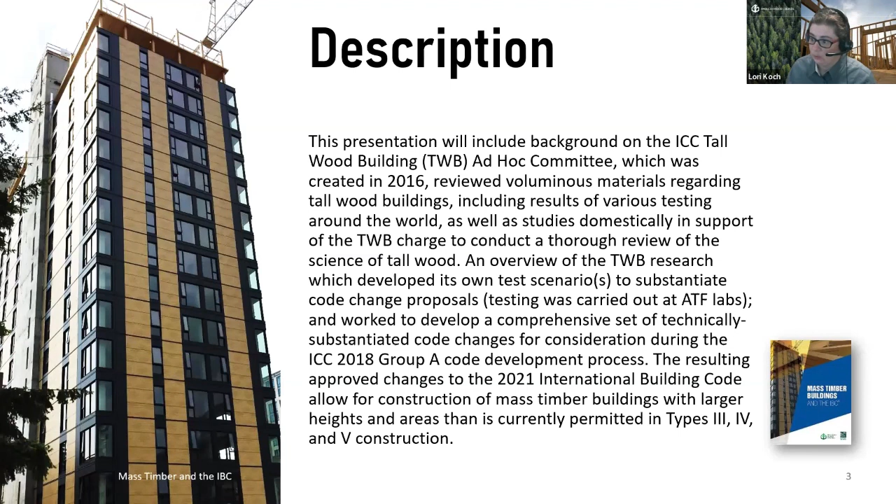Before I get going, I want to emphasize that we're talking about mass timber buildings. These are buildings built from large members, including cross-laminated timber (CLT), glue laminated timber, and nail laminated timber, with members typically on the order of 150 to 200 millimeters in cross section. So these are fairly stout members.

Traditional wood frame construction in the United States has leaned towards conventional light frame construction, illustrated here on the right. These are repetitive members spaced close together, probably on the order of 16 inches on center, about 40 centimeters apart. The members are relatively small in cross-section, approximately 50 by 150 millimeters, give or take. The maximum height we'd see on buildings like this is roughly 4 to 5 stories.

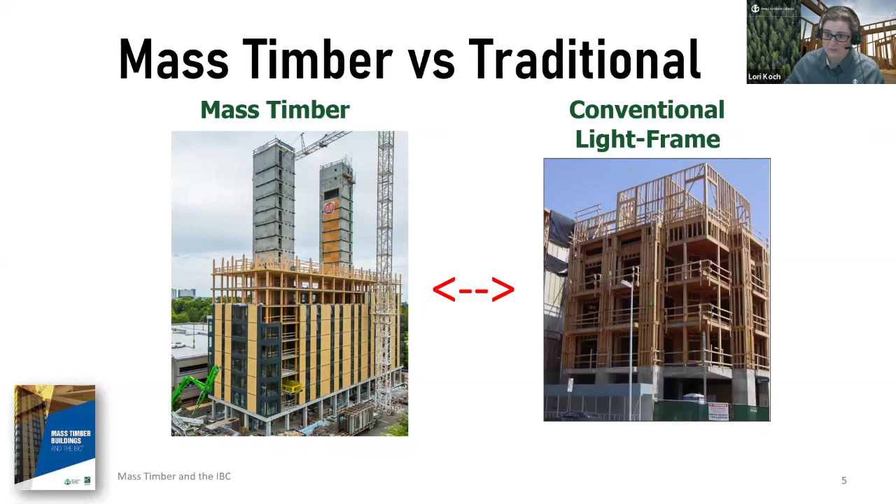Another historical wood frame system that has existed in US building codes for many years, even before we really had building codes, is what's known as Type 4 heavy timber, or Type 4 HT. This is closer to the Type 4 mass timber buildings we'll be discussing. These heavy timber buildings are made of members on the order of about 150 millimeters square, sometimes larger. They have historic roots in old industrial buildings common in America, where the interior was built with very large cross-sectional timber members for floor joists and columns.

The exterior walls of these buildings would be some sort of brick or other non-combustible material, and their performance has been demonstrated throughout history to be good. As the saying goes, if it's not broke, don't fix it. So with Type 4 heavy timber buildings, the provisions were not changed in the 2021 IBC, but they influenced the creation of the mass timber building types we'll outline: Type 4A, B, and C.

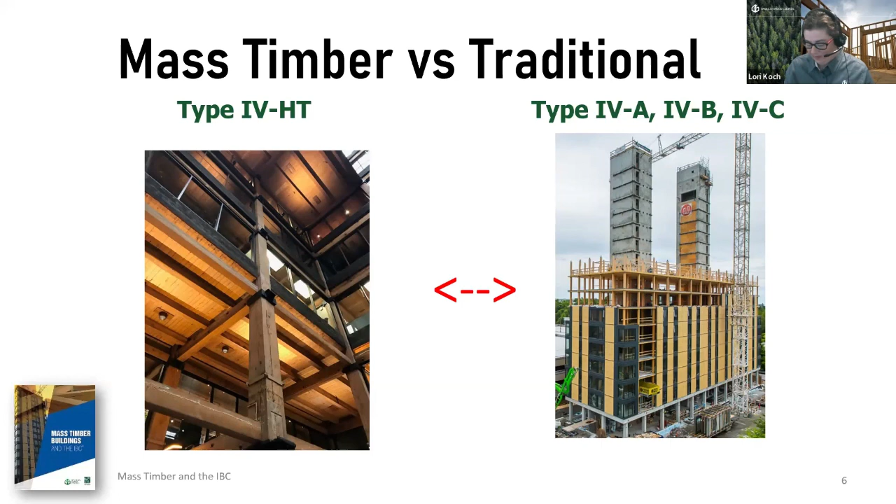So first, today I'll talk a little bit about the Tallwood Building Ad Hoc Committee and their work and some of the consensus process that they undertook. Then I'll close it out with the new construction types and what they look like in the building code.

This ad hoc committee on tallwood buildings was established by the International Code Council in December 2015. Their goals were to explore the science of tallwood buildings, investigate if they were feasible, and if so, take action on developing code changes for tallwood buildings.

This was a very robust committee, a consensus committee with a balance of stakeholders. When we say consensus, we mean everybody on the committee had to agree to any changes before they would be implemented. This group was made up of experts from across the country, both geographically and from various building construction material industries and areas of expertise.

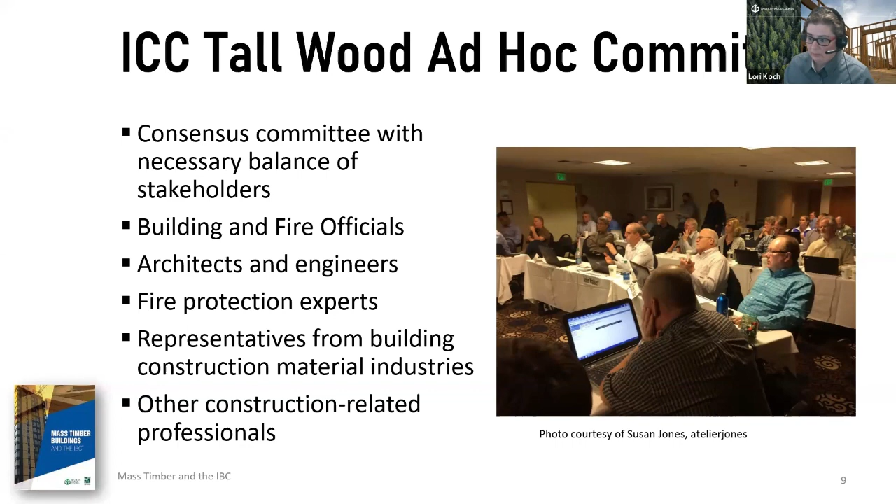We had experts in the building code, experts in the fire code, architects and structural engineers, fire protection engineers and other fire protection experts, and other construction-related professionals whose input was monumental in getting this effort across the finish line.

There were several work groups created as part of this committee, and primarily today we're going to talk about the work done by the fire work group. The fire work group created fire test scenarios to study and validate these tallwood building change proposals.

The largest test done by the fire work group was a full-size two-story condo or apartment style structure. The interior dimensions of the apartment area are about 30 feet by 30 feet, which is about 9 meters by 9 meters. The structure also had a corridor and a stair.

When deciding how much stuff was going to be inside these apartments, a research study done in North America by an organization called UL helped us determine a modern furnishings fuel load was appropriate. We used a fuel load approximately the 85th percentile of a residential fuel load, called a Group R fuel load in the building code.

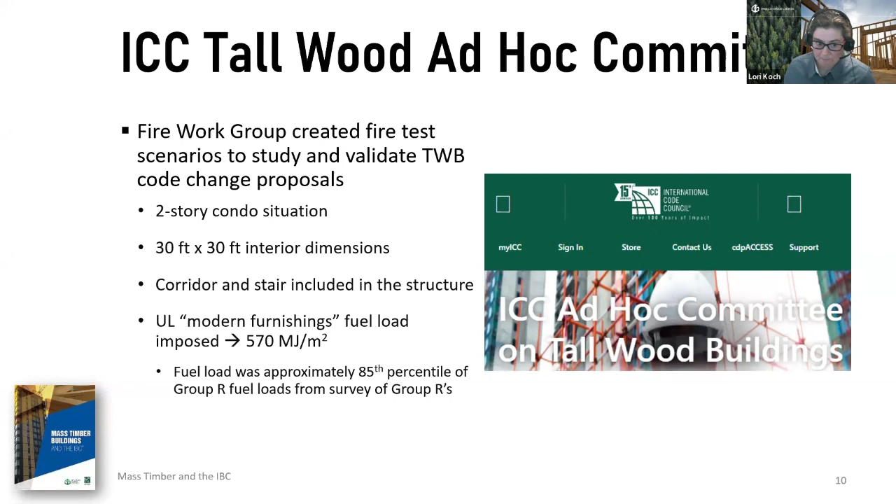So this is what the building looked like before we started setting it on fire. The purpose of these tests was to perform realistic fire scenarios applicable to tallwood construction, and they wanted to evaluate two main things: occupant egress and firefighter tenability for suppression efforts.

This means we wanted people in the building to be able to safely get out, and we wanted firefighters to be able to safely get in to fight the fire.

This test was done at a U.S. government facility owned by the Bureau of Alcohol, Tobacco, and Firearms, and it was also supervised by U.S. Forest Products Laboratory staff, a division of the United States Department of Agriculture.

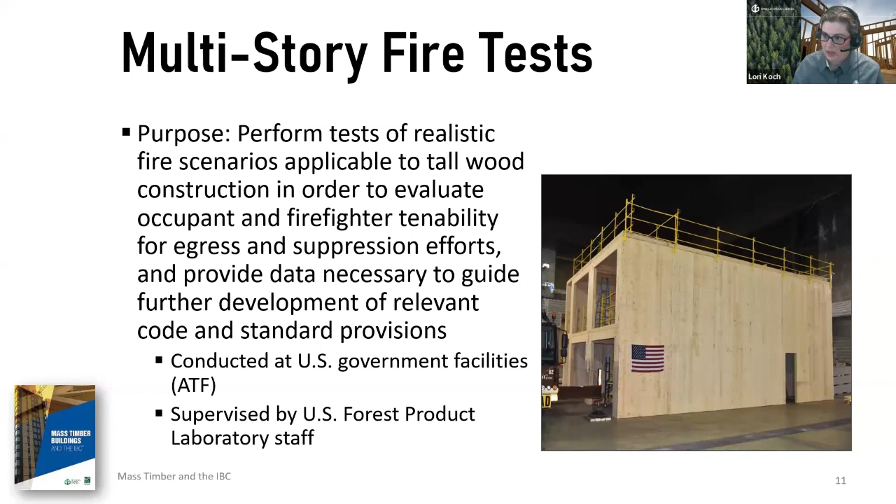There were also several other individuals present for this series of tests. I was actually able to witness the first one, but they were done on separate days, so different folks witnessed different ones.

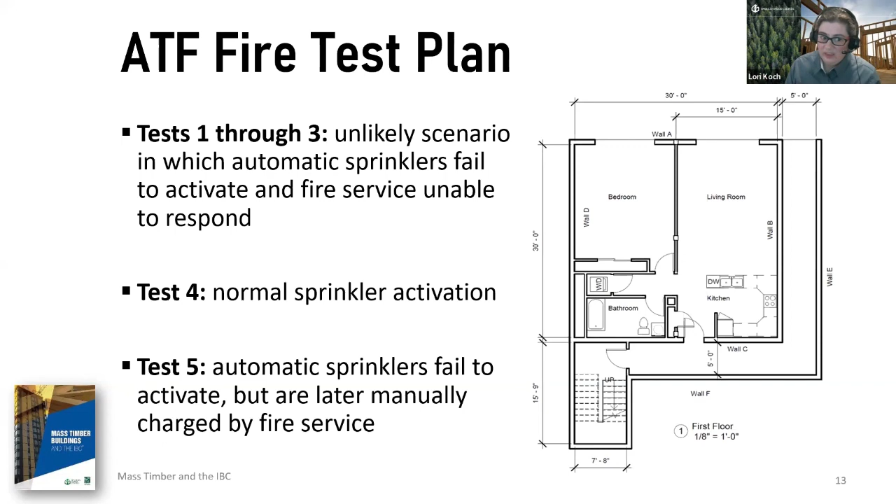The other important thing for all of these tests was that each type of proposed building, or each proposed building type, was represented in the fire test scenarios. There wound up being 3 new proposed building types in the code, and each of them was represented in at least one of these 5 tests.

The first test is the baseline test. This is akin to a type 4A structure where all of the mass timber surfaces are protected with 2 layers of 5/8 inch thick type X gypsum wallboard. Type X gypsum wallboard is a cementitious board applied over the mass timber, and it's considered non-combustible. This establishes a baseline for a structure where no mass timber is exposed and won't contribute to any fuel load.

Tests 2 and 3 both had a little bit of the CLT exposed in the living room and bedroom areas. Test 2 had some of the ceiling area exposed, and test 3 had 2 of the walls exposed. These first 3 tests were pretty long in duration, between 3 and 4 hours. They were allowed to run until the fire ran out of contents or fuel to burn and went into what's known as the decay phase, where it's no longer gaining energy and is starting to extinguish itself.

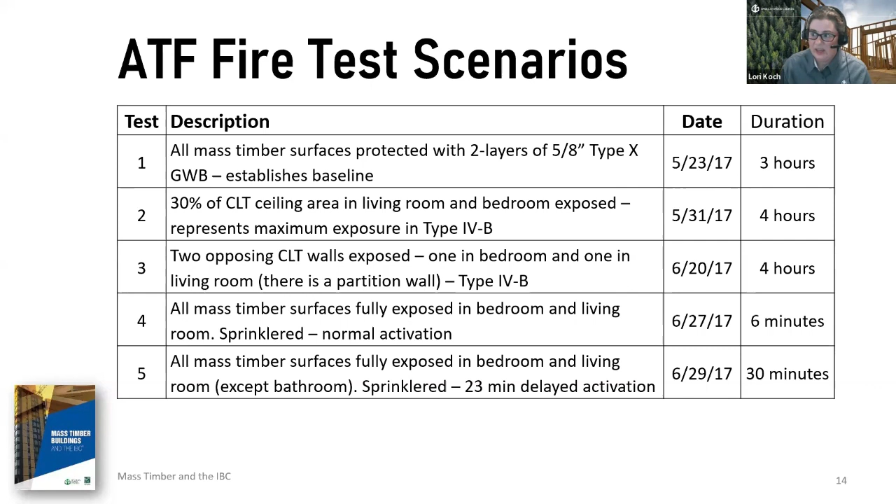The last 2 tests represented a type 4C structure, where all of the mass timber surfaces are fully exposed. In test 4, the sprinklers activated normally. In test 5, the sprinklers had a 23-minute delayed activation. We'll talk about why we picked that number, that 23 minutes, in a little bit.

Looking at the structure again, here's a 3D rendering of the wood elements present in this structure. As mentioned, it's a 2-story structure with 1 apartment per level. Each apartment is roughly 30 feet by 30 feet, or 9 meters by 9 meters. The height of the ceiling is 9 feet, just shy of about 3 meters.

We used what's called a 5-ply CLT, meaning there are 5 layers of Douglas fir larch lumber in that cross-laminated timber panel. Each ply, or lamination, is 1.375 inches thick, around 35 millimeters. The whole thickness of the panel is 6.875 inches, or around 175 millimeters. The laminations are connected with a polyurethane adhesive between them. There's a corridor around each apartment and a stairwell in the back.

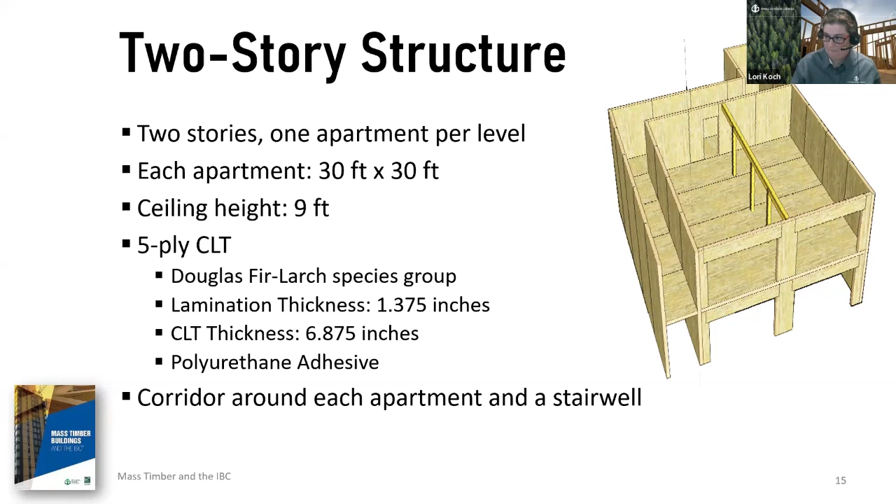Looking at a more finished version of the structure to give an idea of the layout: when I talk about the kitchen side versus the bedroom side, in between we have 2 main areas - a kitchen and living room, and a bedroom and bathroom area. Looking at this top illustration, the leftmost room is the kitchen/living area, and the rightmost room is the bedroom and bathroom area. Since most fires are found to start in the kitchen, in the fire tests we will see the point of ignition occurs in the kitchen.

Each of these 2 rooms is roughly 15 feet by 30 feet, about 4.5 meters by 9 meters. Between the apartment and the corridor, we have a 20-minute rated door. Between the corridor and the stairwell, we have a 90-minute rated door. The partition between the kitchen/living area and the bedroom/bath area is made of a 1/2-inch unrated gypsum wallboard, which is different than the type X gypsum used in other places.

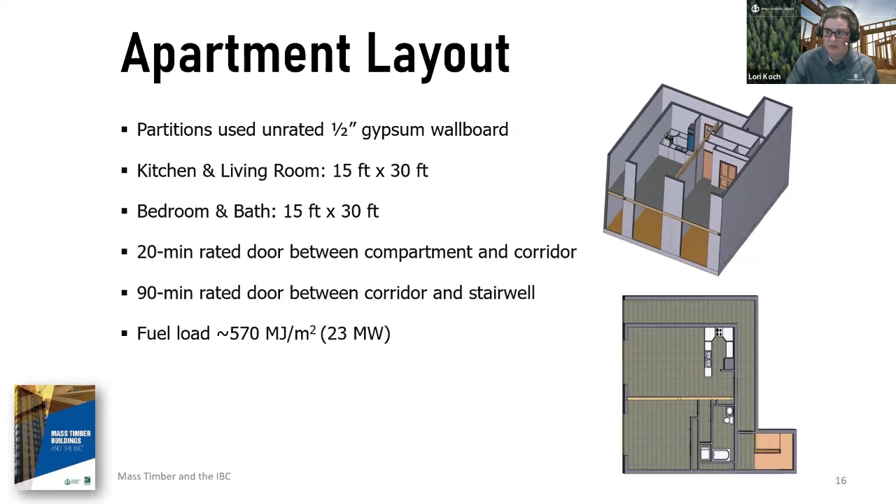Going in for a typical tour of what it looks like after it's constructed, but pre-testing, we see that a good portion of the fuel load was achieved through a combination of typical residential furnishings. We have combustible floor coverings, combustible cabinetry, and other contents that can combust. But even with all of the furnishings and contents, we still found it was necessary to add additional load to achieve that 570 megajoules per square meter.

So we see in certain instances the addition of wood cribbing on top of the desk here. You can see quite a bit of it. Next to the bed in the center bottom illustration, you'll see some additional fuel around that. That's why you see those pieces of wood present to obtain the necessary fuel load.

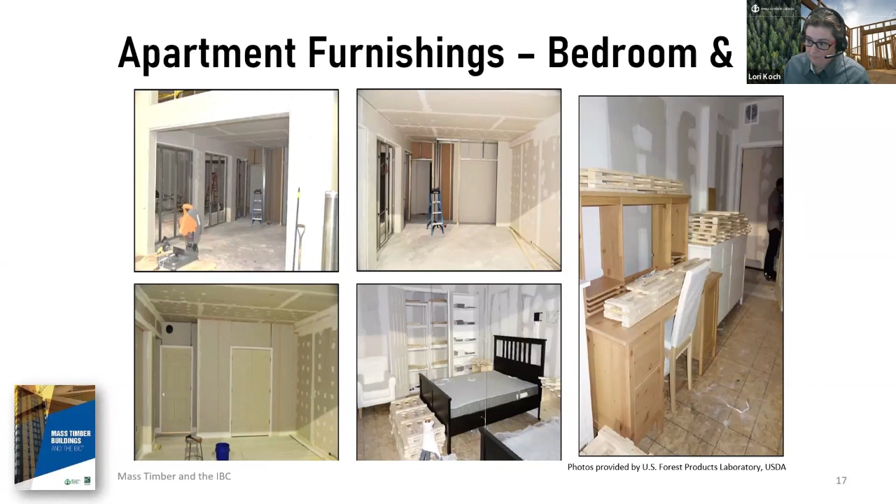This shows the top floor apartment that we tested that had some of the ceiling exposed. Also of note, we have a soffit, which is common in kitchen construction, where the ceiling is dropped slightly to accommodate for utilities or other things. In mass timber structures, we cannot have mass timber exposed in concealed spaces. So that's why we do see these steel studs present in this top left photograph here.

Additionally, each unit did have plumbing, mechanical, and electrical penetrations, but the utilities themselves were not actually connected. The penetrations were protected as required by the current code to make sure those requirements were effective when used with mass timber structures.

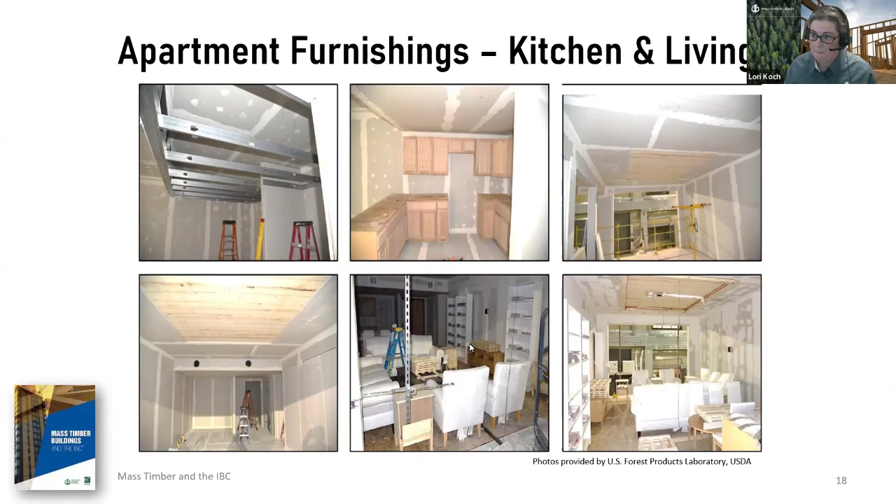So as I mentioned, test one, the first test we did, was our baseline test where none of the mass timber was visible. It was all protected with 2 layers of this 5/8 inch thick type X gypsum wallboard. And this is an illustration of the test beforehand, and I have some pictures.

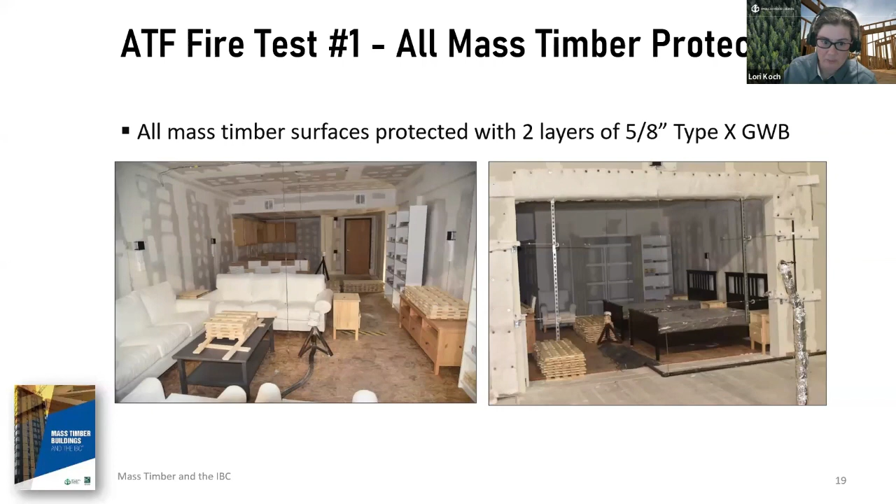So we've gone through our decay phase where the fire was allowed to burn without intervention. It consumed all the fuel in the compartment. We found that once the combustible contents were burned through, there was no additional fuel. The mass timber elements did not become involved or contribute to this fire in any way.

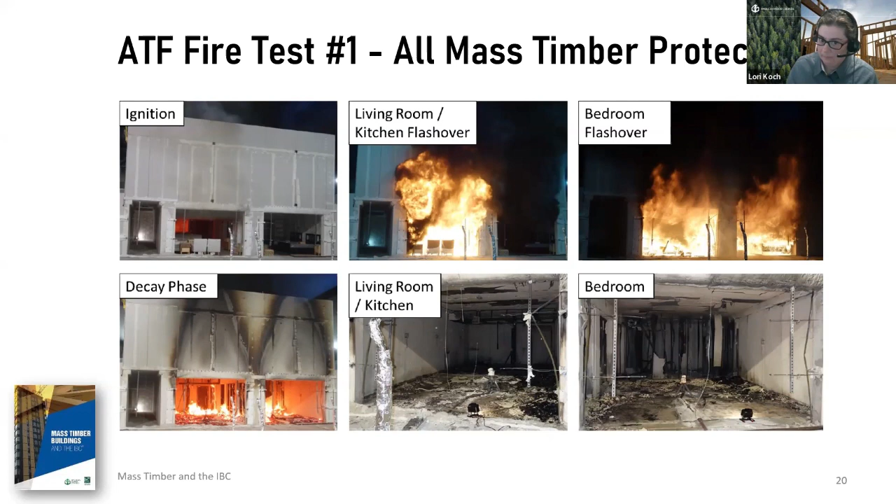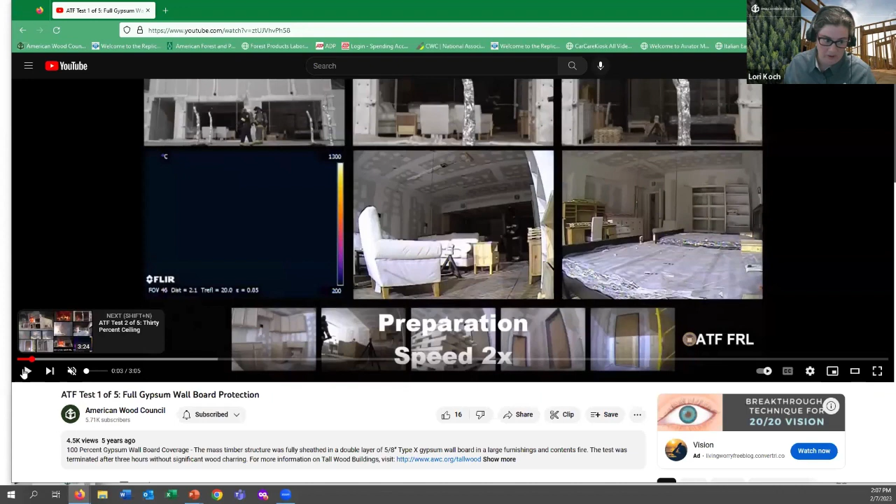And I do have a video of this test. Let me go ahead and drag this over, and we are going to keep it muted because the sound isn't so important. If you are interested, the link that we'll show on the slide has a link to our YouTube channel where we have videos of all 5 of these tests.

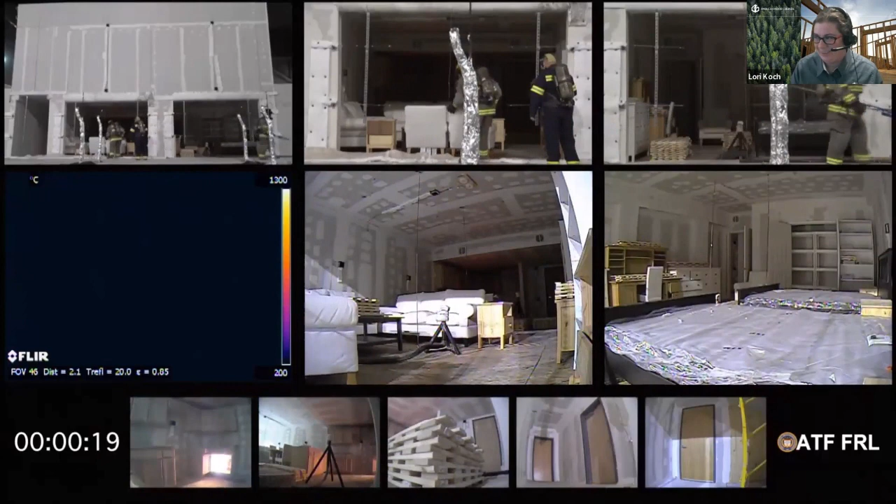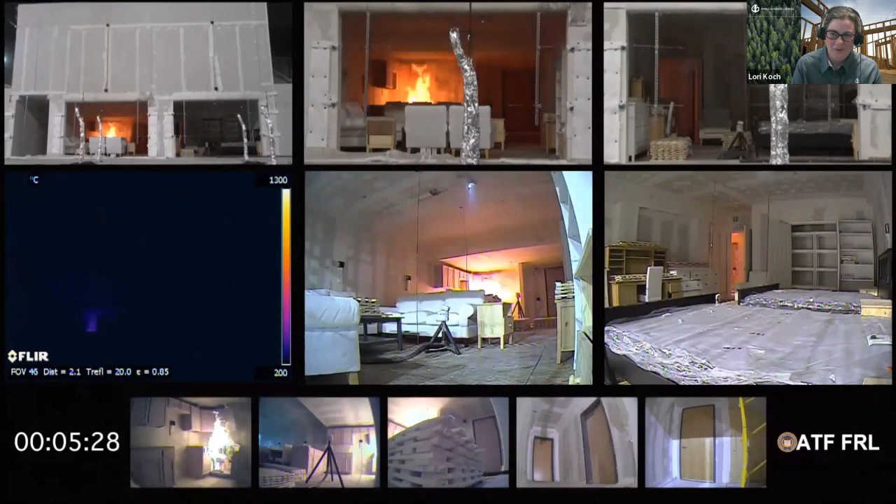But in my opinion, this one's probably the best one. It was the kind of most intense heat that was measured from all of them. They were all pretty close, but this one also was the first. So we thought we knew what to expect, and the results were in line with what we had modeled, but we also had that element of we weren't 100% sure.

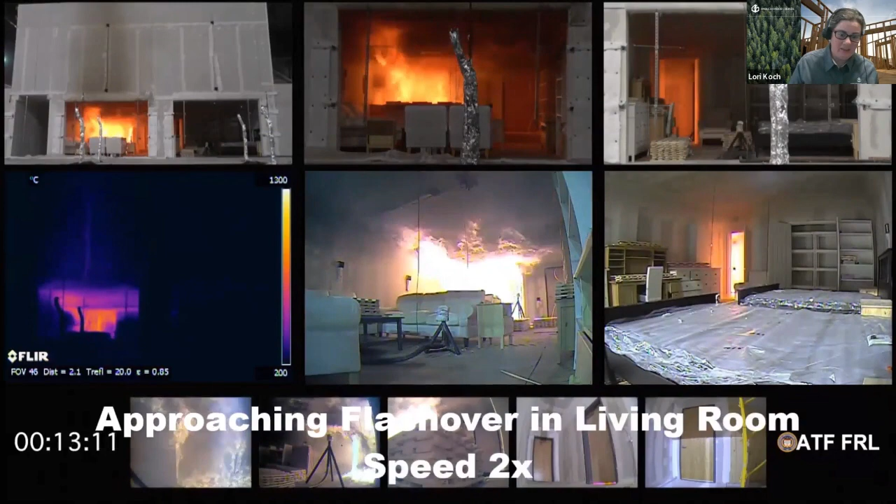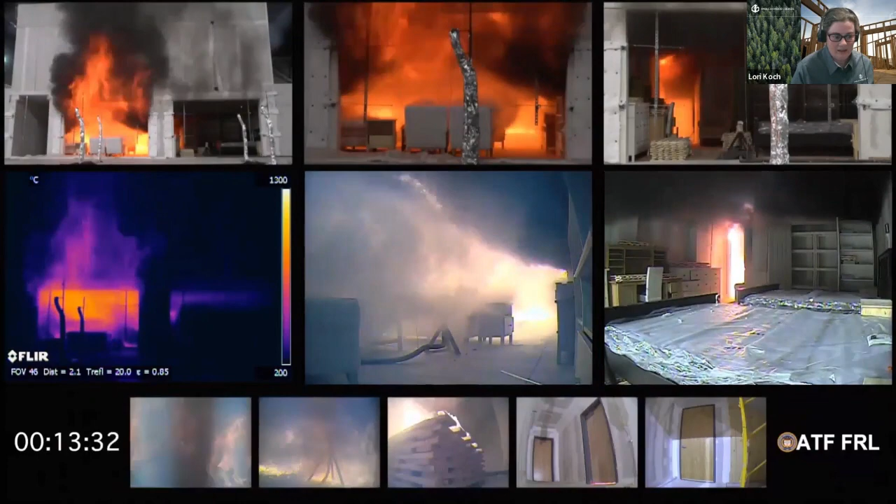So we see that we're approaching flashover in the living room compartment. As the flames propagate across the ceiling, the air becomes superheated, and then the contents will ignite. And then as we then approach the second compartment, it starts to contribute, become part of the fire load. We see on the thermal image on the left side of the screen, the ceiling heating up as we approach flashover in the second compartment in the bedroom.

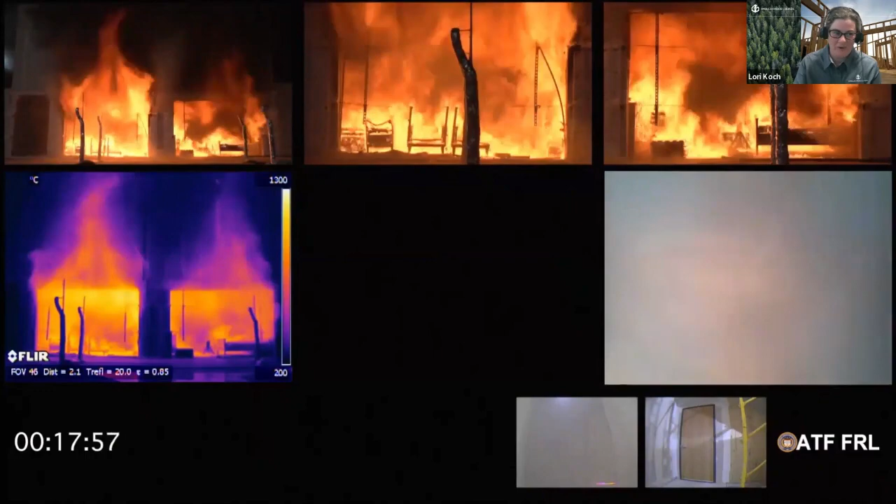And there we go, there's our second flashover. Again, that happened about 17 minutes after ignition. So the rest of the test was less interesting from this point out. We just kind of had to sit and wait for it to finish.

So we've got this time lapse here. We do have some videos showing the performance of the fire-rated door, which was a 20-minute rated door, and it failed just about 58 minutes. So in line with the performance that we would want.

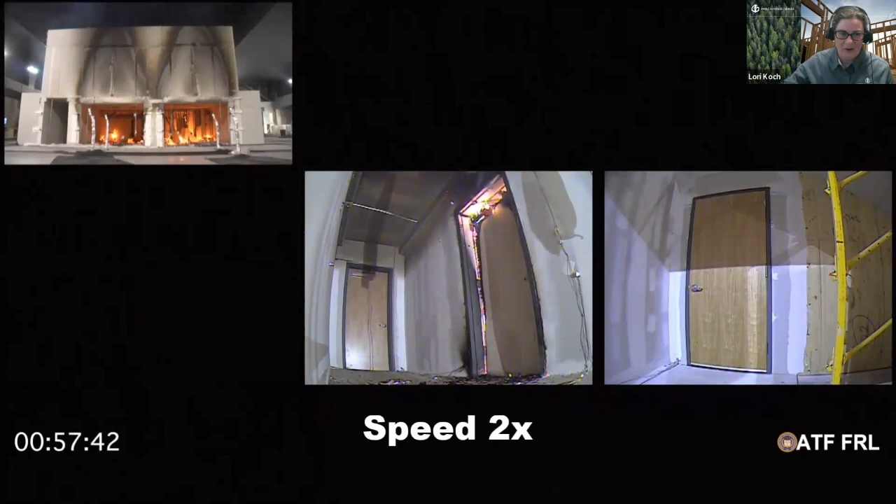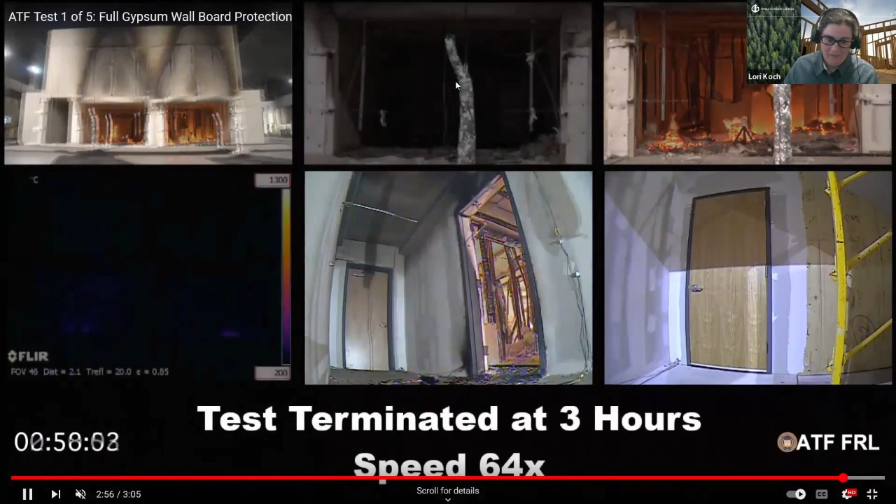As the intensity of the fire starts to die down a little bit, some of our cameras were able to come back online. And there we see the test terminated at 3 hours.

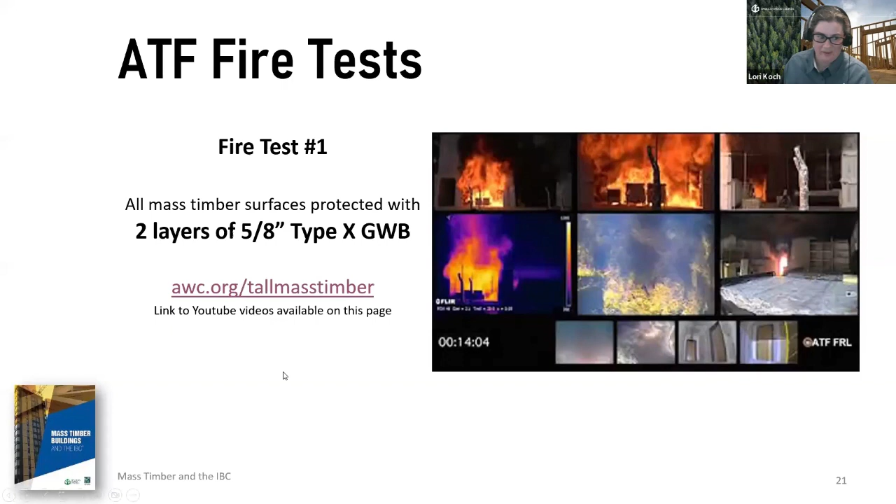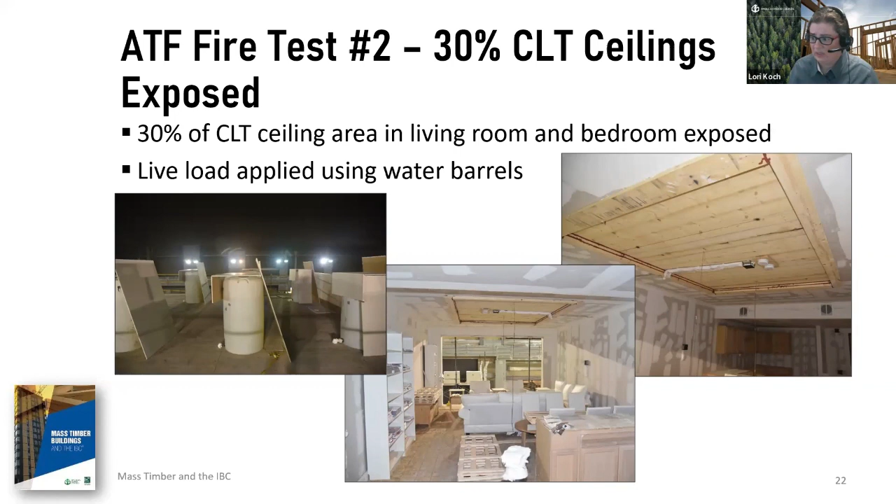Test number 2 was similar in that we had some of the CLT covered with type X gypsum, but 30% of the ceiling area in the living room and bedroom areas was exposed. We had live load applied on top of the structure using water barrels, in line with the residential design load used in the structure. This was again in line with type 4B construction, where some CLT is allowed to be exposed, but the remainder must be protected.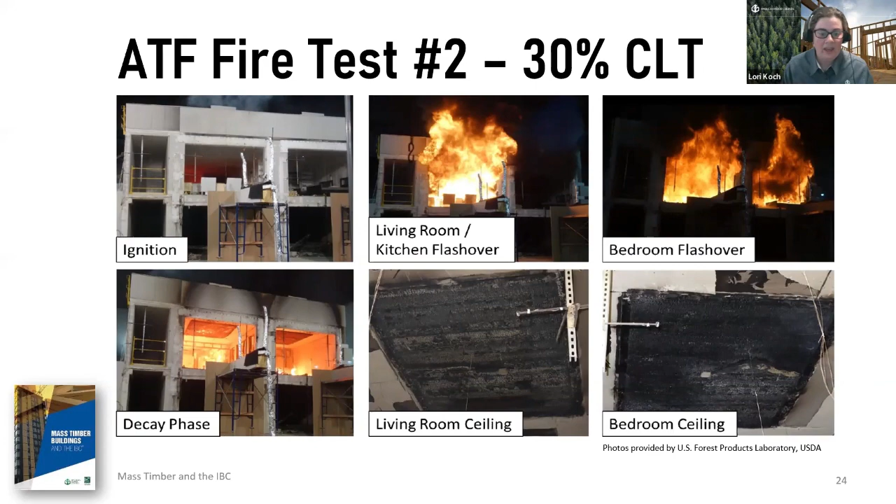We have some photos of that test. Ignition again in the kitchen, and both compartments flashed over almost exactly the same amount of time after ignition. The living room kitchen area was again 12.5 minutes, and the bedroom was at 17 minutes, so almost to the second. We see the decay phase in the bottom left, and the bottom center and bottom right illustrations show the CLT panels that were exposed during the test.

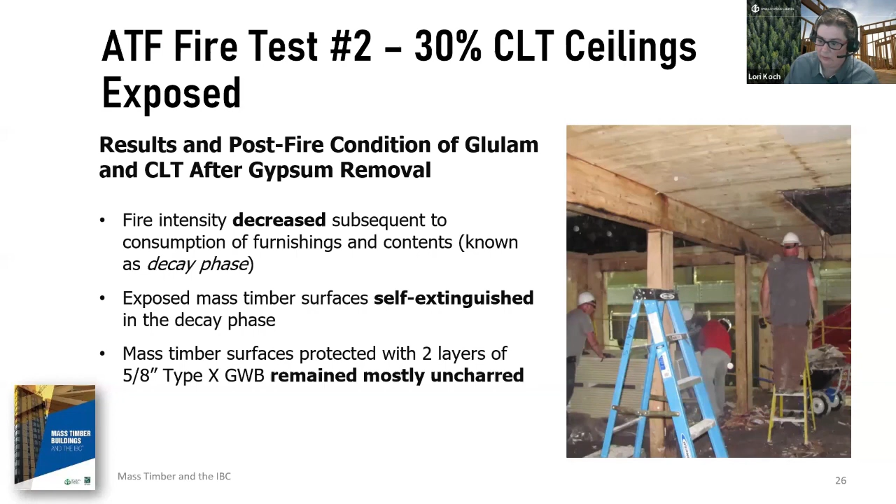Again, the areas protected with the gypsum wallboard were largely uncharred, with the exception of a little bit of limited charring just at the corners of the glulam beam noted here. But the remainder of the mass timber elements remained largely intact.

After the fire, the section of mass timber that was exposed to the fire was removed and replaced for the next test, and sections of that panel were sliced so they could be more closely examined.

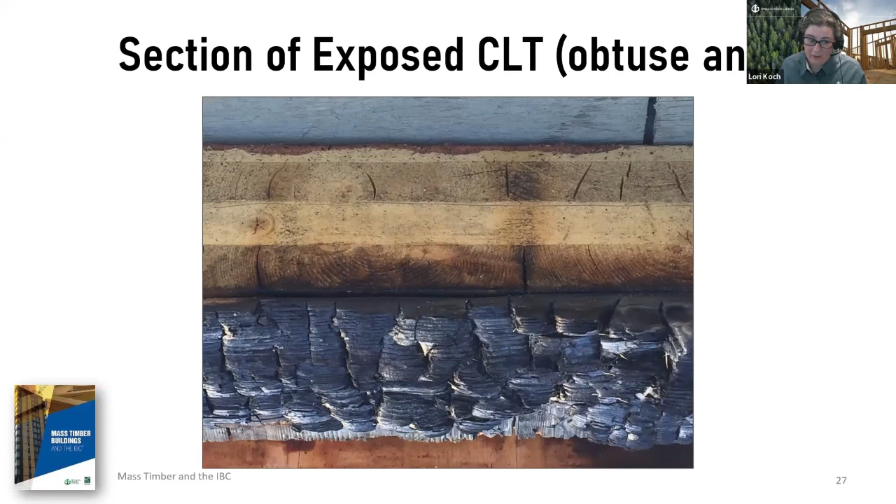Here's an obtuse angle, not exactly straight on, of the panel we see after the test. We see a char layer that we call kind of an alligator skin pattern, because it does look a little bit like an alligator hide, clearly visible, and the protection of the inner layers by that insulating char is noticeable as well.

Looking at another cross section, once the char is knocked off, we can see more clearly how much of the material did remain intact after the test.

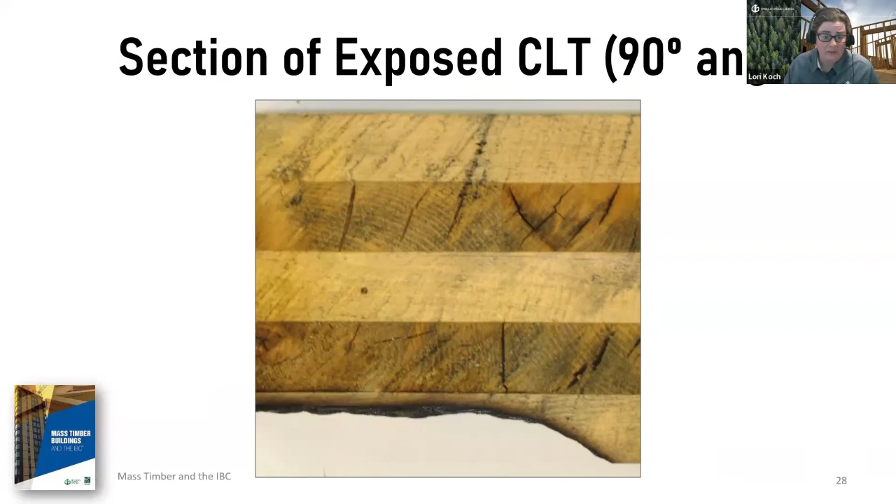In this illustration, we see a portion of the CLT is not damaged on the right edge of the photo, and that portion was protected by the gypsum wallboard. The portion that was unprotected is more towards the center and the left, and we do see we have lost approximately 1 full lamination, or about 1¼ inches, which is 30 millimeters or so, but the remaining 4 laminations are relatively intact.

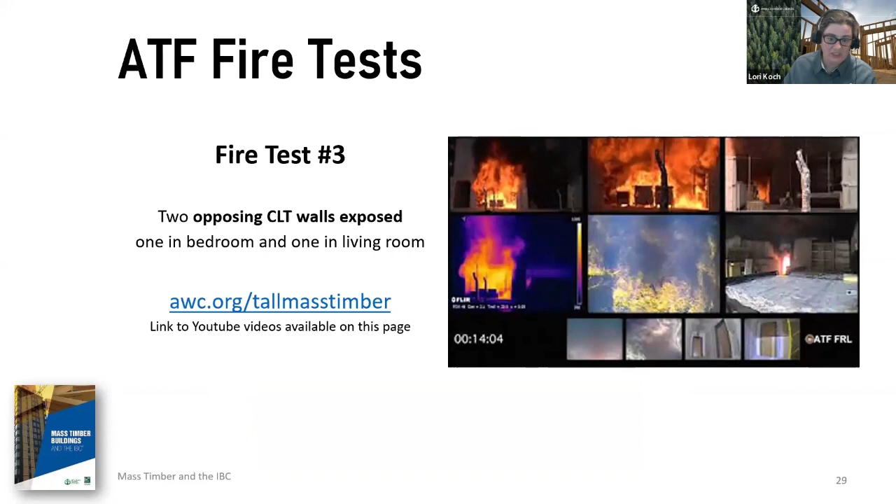The center partition, which separates these 2 rooms, has in each of these tests an unrated gypsum wallboard covering. It does not need to be fire resistance rated because the glulam beams and columns are actually carrying the load, so the wall itself is non-load bearing.

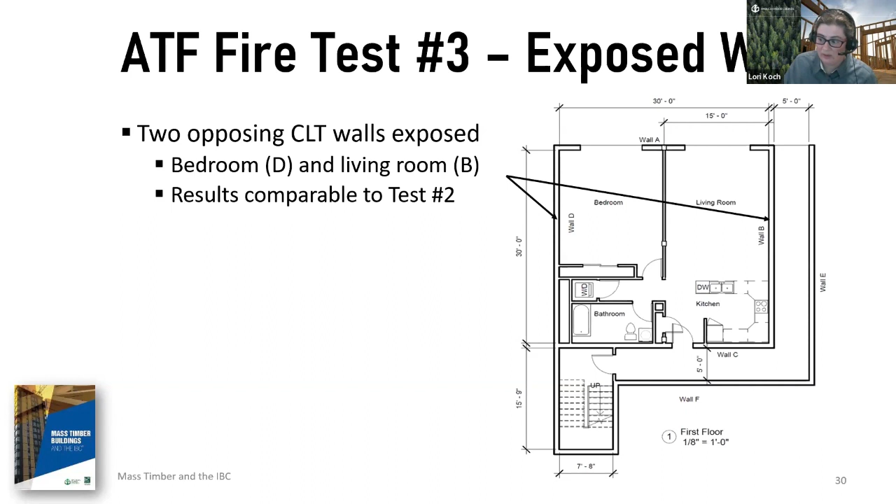Test 3, again done on the top story of the structure, had flashover occur in both compartments around the same time as the first 2 tests, and the fire was allowed to progress without intervention all the way through the decay phase and through burnout.

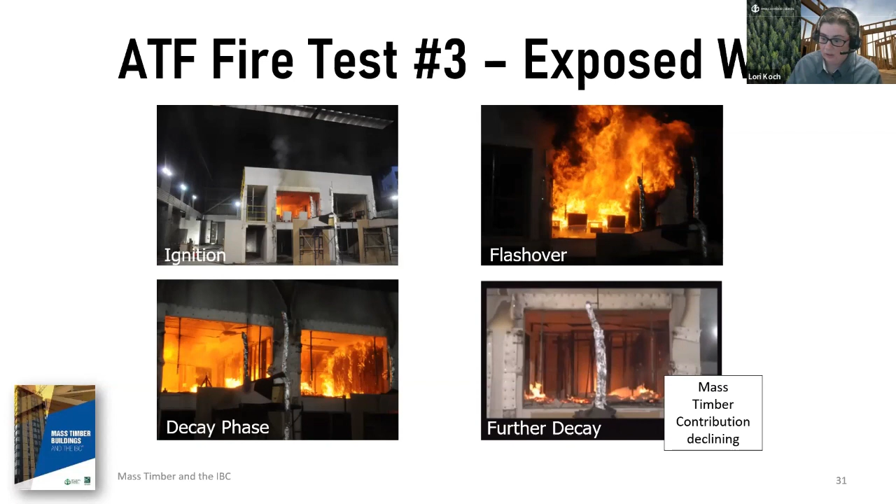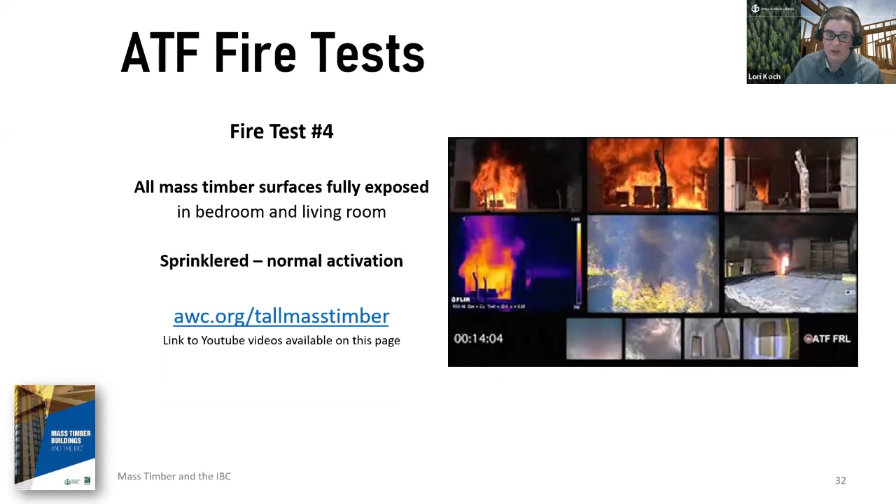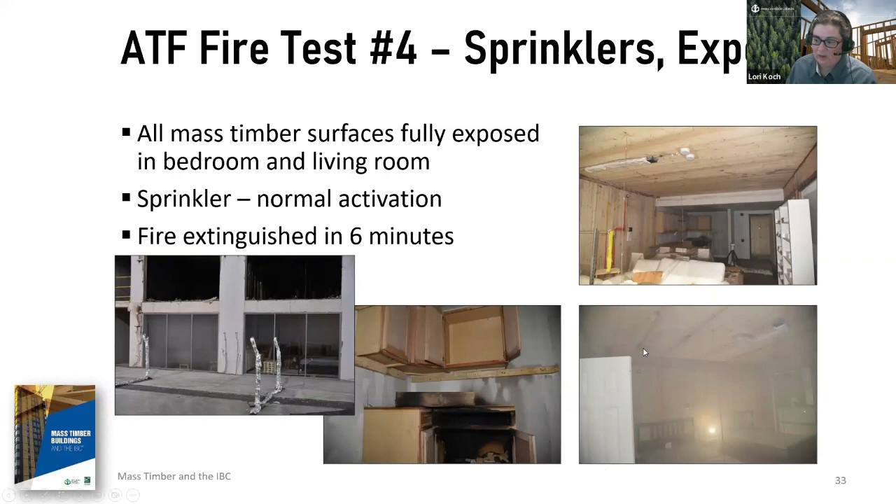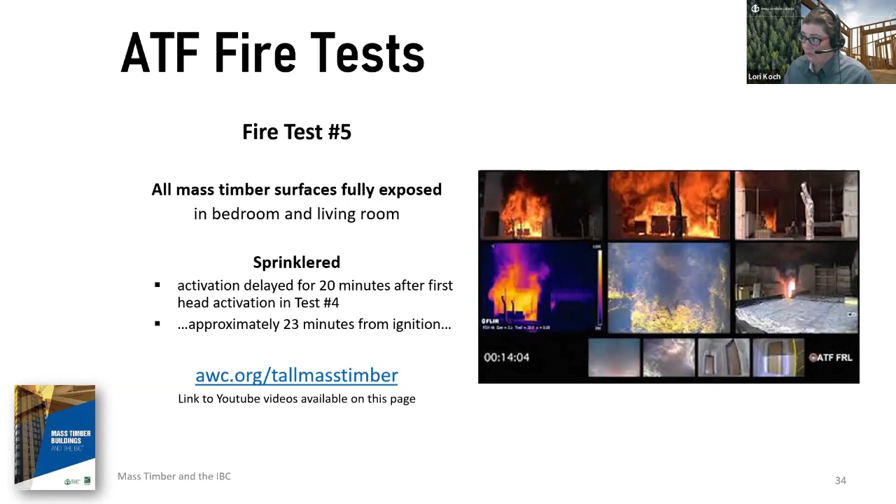Test 5 is again another test where all of the mass timber surfaces are fully exposed in the bedroom and living room areas. There was a delay in the activation for the sprinklers, 20 minutes after the activation time from the previous test. In the previous test, the sprinklers activated around 2.5 minutes after ignition. We added 20 minutes to that time and got roughly 23 minutes. That's how we picked the activation time for the sprinklers. This represents a scenario where the sprinkler system did not automatically activate, but was subsequently charged by the fire service, the firefighting crew, upon their arrival at the scene.

Flashover was reached in the kitchen compartment during this test, and the bedroom area was close to reaching flashover, but did not reach it before the sprinklers activated. Within 7 minutes of the sprinklers activating, the fire went from the fully developed stage to being effectively suppressed, which is what we see in the bottom picture here on the right.

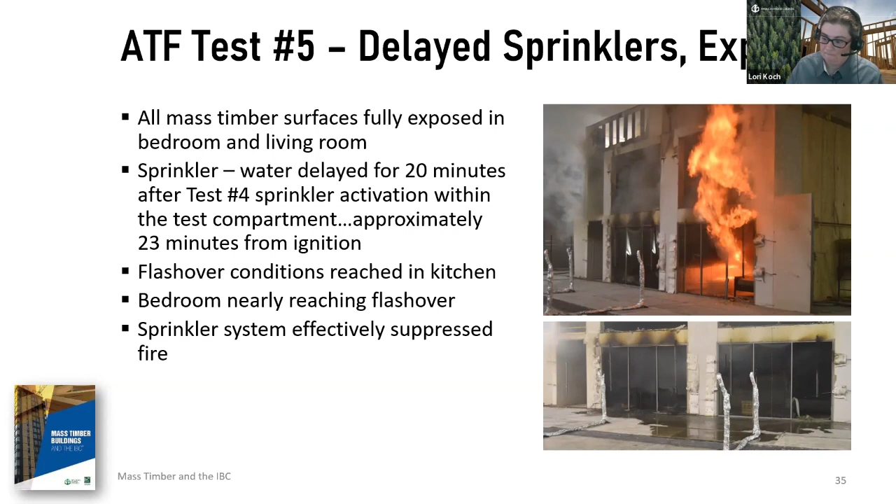Here's a brief event log summary for all 5 of the tests. We see that the flashover conditions in the living room and the bedroom were fairly consistent, roughly 12 to 13 minutes after ignition for the living room and 17 minutes in the bedroom, and this is despite the presence of different amounts of exposed mass timber.

The time it took for the flames to breach the 20-minute rated door into the hallway was higher for tests 1 and test 2. In test 3, we noticed there was a door frame installation error, so the premature failure of the door in test 3 compared to tests 1 and 2 was attributed to that error.

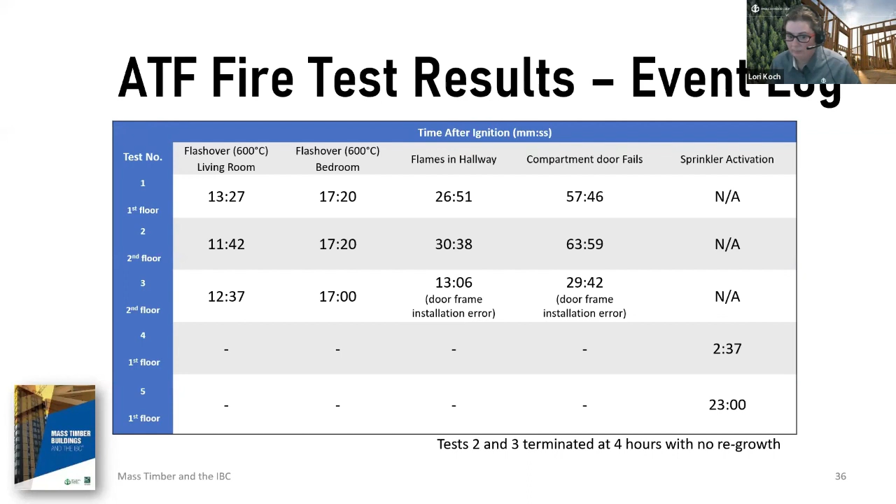Prior to the test, I mentioned we did some modeling, and it's always nice when your computer model agrees with the real data that you see in real life. These particular models were conducted by some fire professionals at the Research Institutes of Sweden, an organization also known as RISE.

This particular graph is from test number 2, where we had 30% of the CLT ceiling exposed. The solid black line represents the predicted heat release that the model showed, and the blue line shows the measured heat release during the test. So the behavior of the test was fairly consistent with the predicted behavior.

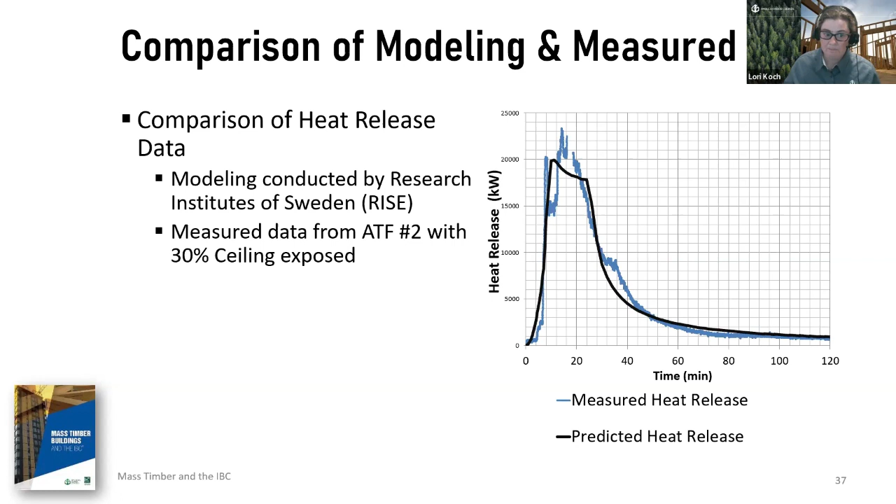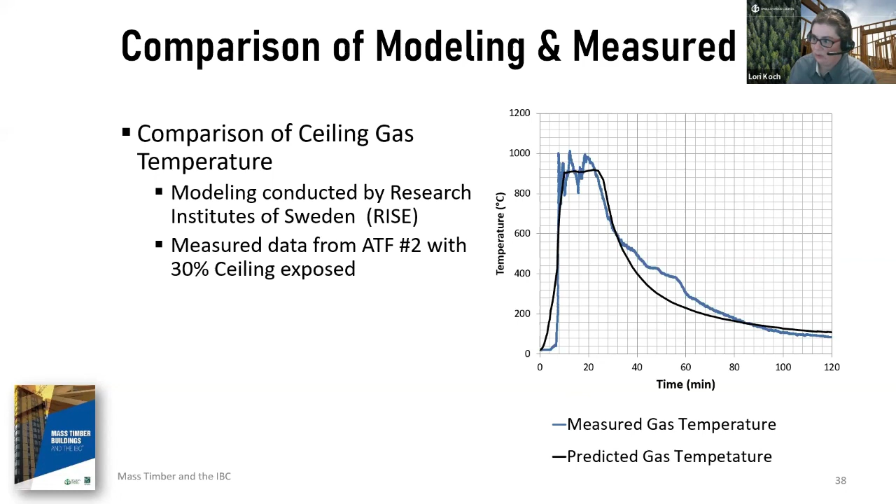Additionally, modeling was conducted to predict the ceiling gas temperature, and this again is data based on the test number 2 model. We saw that the predicted behavior and the actual behavior were very accurate.

So again, each new construction type that I've talked about has been tested in at least one of these 5 ATF tests. This fire test plan was developed by the Tallwood Fire Work Group. However, there was another work group that had some additional input into this test, the structural work group. This structural work group had some generic connection designs that they wanted tested in this fire testing as well, so there were also structural connections being evaluated in this test.

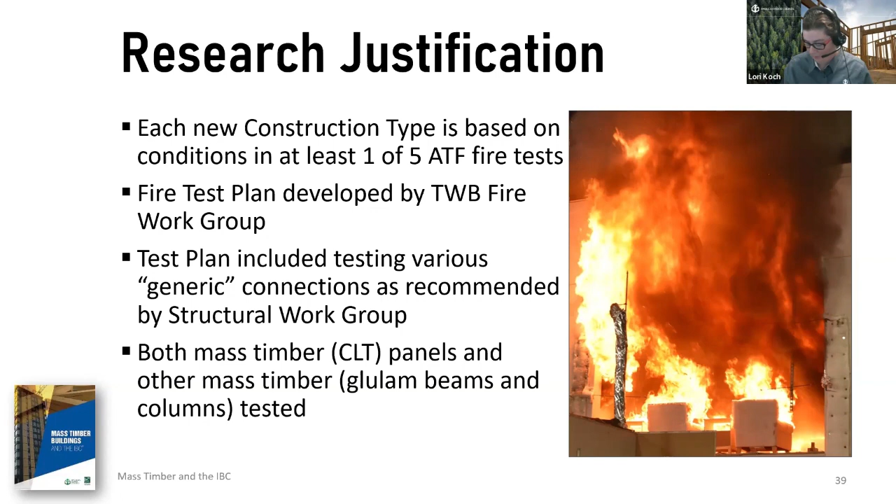I mentioned we tested both mass timber, cross-laminated timber panels, and other mass timber elements, including glue laminated timber beams and columns. If you want a full report of all of those tests, we have a very robust document published by the United States Department of Agriculture, and a link is available on our website, awc.org/tallmasstimber. Videos of all of the fire tests are also available on that website.

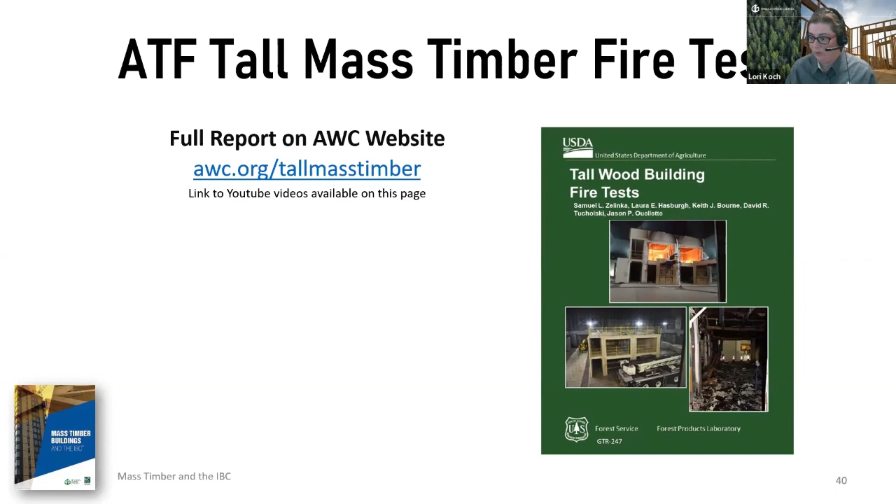So after all of that testing, all of the data was collected, and other code changes were reviewed. There were 14 total code change proposals under what's known as a Group A code change. Hundreds of code sections were reviewed, and eventually the committee decided on the 3 new types of construction that I've alluded to: type A, B, and C.

These construction types differ primarily in their height and the allowable area. There are limits for these buildings in the code that are listed in feet - sorry, we're not on the metric system - and we also have the height limited to number of stories as well. There are also limits on the area, the footprint of the building, in the International Building Code, and there were multiple new requirements for safety during construction for these buildings as well.

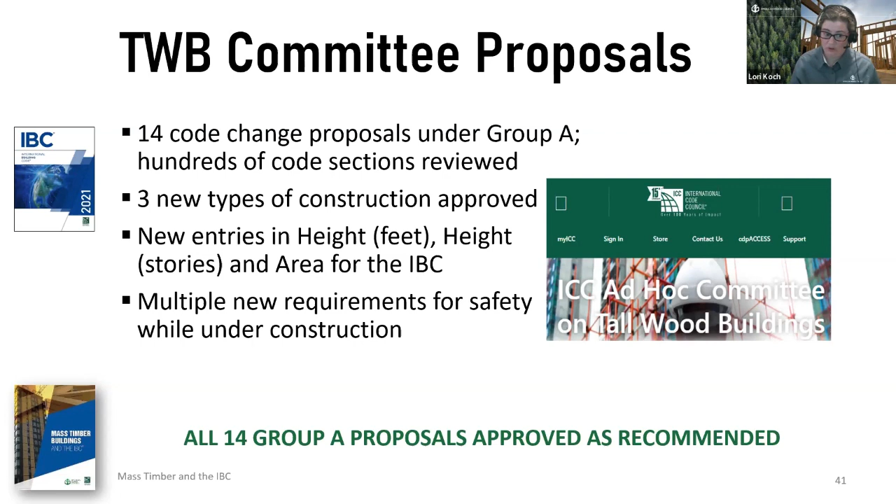Two of the important definitions that came out from this committee are the definitions for mass timber, which we can see here: structural elements that consist primarily of solid, built-up, panelized, or engineered wood products that meet minimum cross-section dimensions. Those minimum cross-section dimensions are important because they are based on the historical Type 4 heavy timber minimum cross-section dimensions, so we didn't really reinvent the wheel here.

There were many new definitions added; I'm just focusing on these two today. The other important one is non-combustible protection for mass timber. In short, for what we'll be using in these types of buildings, that's primarily going to be 5/8 inch thick type X gypsum wallboard, which we used extensively in the tests. That's a product used very commonly in the US, not a specialty product by any means.

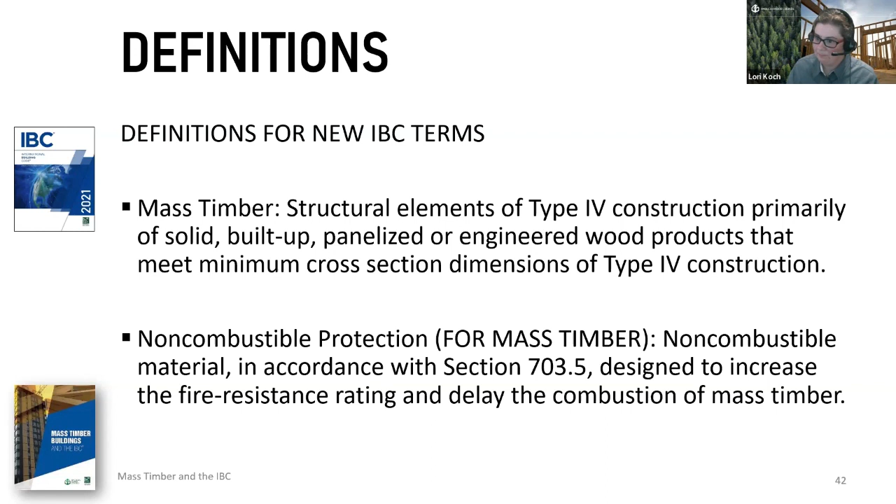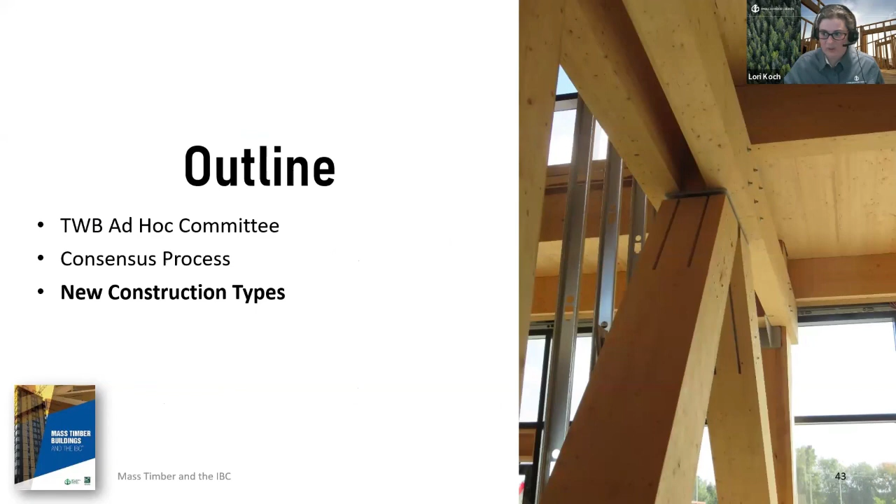So we went through the work the committee did and all of their consensus work—what is the actual end result? There were 3 new construction types: type 4A, type 4B, and type 4C. We had a construction type in the building code before, the heavy timber provisions, that used to simply be known as type 4. That was renamed type 4 heavy timber; nothing else was changed about it. It was working great and we didn't want to mess with it. There were some references in the code where they'd referenced heavy timber as opposed to mass timber, so those references were cleaned up and clarified where necessary.

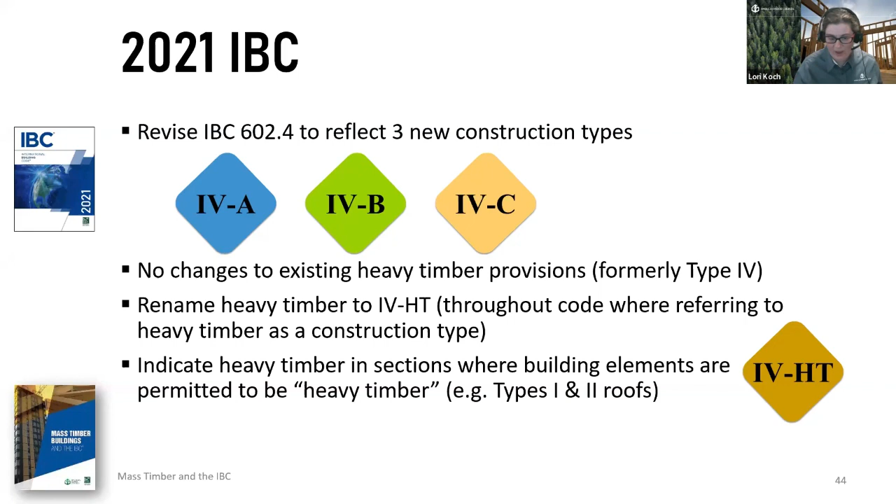But we've got these 3 new construction types, and there's 1 primary difference between them: how much of the mass timber wall and floor area is allowed to be exposed versus protected with non-combustible elements. Type 4A has to have all of the mass timber protected with non-combustible elements. Type 4B allows limited elements of mass timber to be exposed, not protected with non-combustible protection, but there are limits on how close they can be and how big the areas can be. Type 4C allows for all of our mass timber surfaces to be exposed—floors, walls, ceilings, all permitted to be exposed.

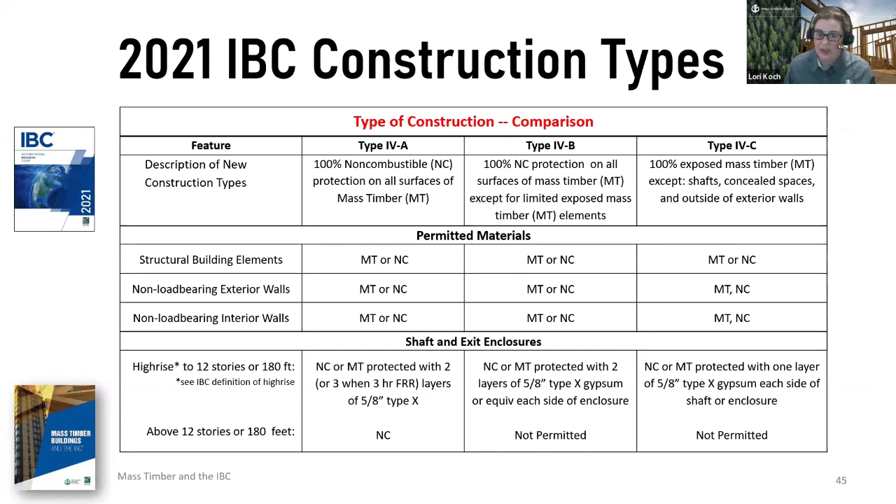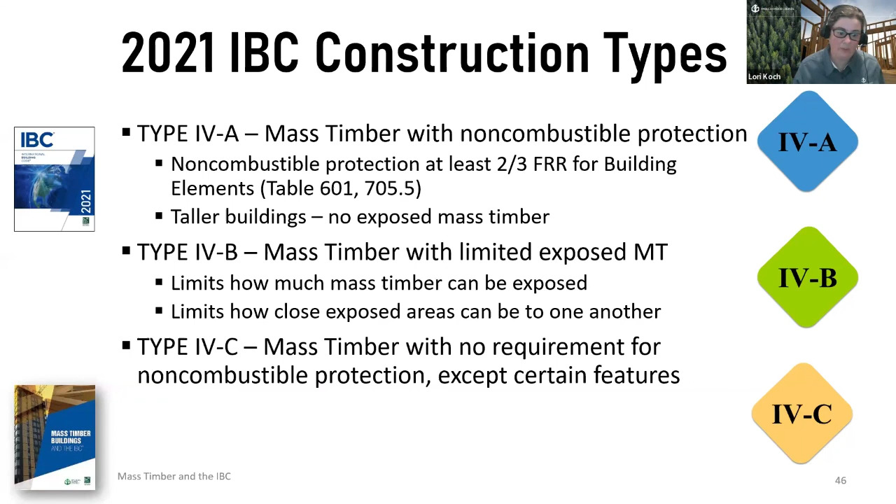There are some requirements where you do have to have non-combustible protection in type 4 buildings, including shafts, elevator or stair shafts, concealed spaces, and on the outside of any exterior wall—for all of these buildings. For type 4A, at least 2/3 of the fire resistance rating for the building elements must be from non-combustible protection, since these are our taller buildings, so we're not going to allow any exposed mass timber. Type 4B limits how much mass timber can be exposed and how close they can be, and 4C has very few requirements on non-combustible protection with certain features.

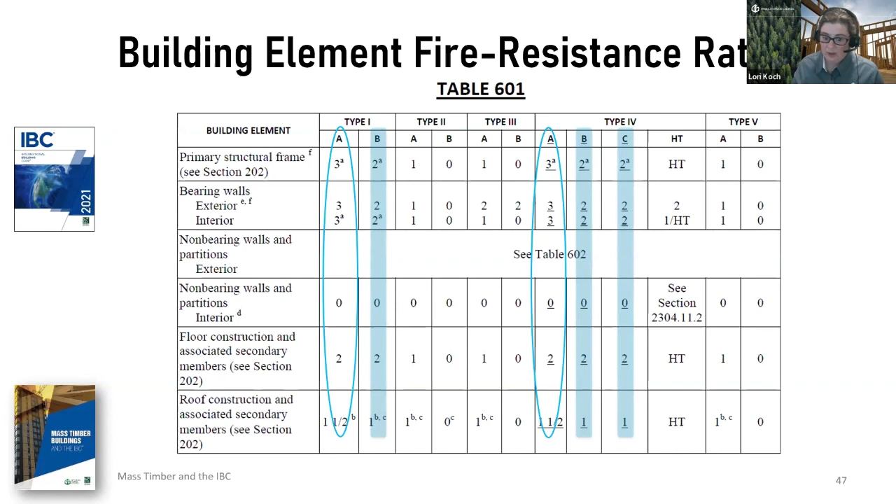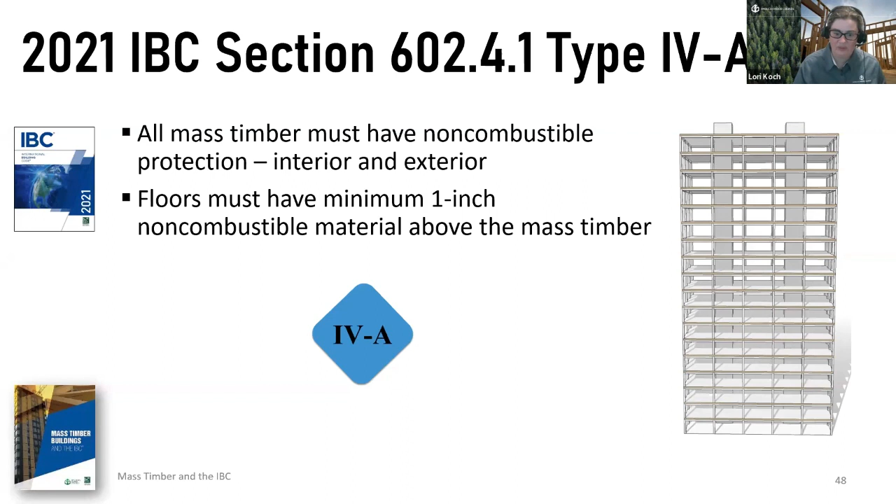So when we look at what a type 4A building looks like, we don't see any mass timber. We have non-combustible protection on the interior and exterior, and all floors must have a minimum of 1 inch of non-combustible material above the mass timber. This is typically achieved with a lightweight concrete topping, also known as gypcrete. This is good not just for non-combustible protection, but it also helps with sound transmission, since a lightweight floor can transfer certain sounds more readily, so this helps dampen that.

The maximum height for type 4A buildings is 270 feet, about 82 meters. The number of stories depends on the occupancy class. For certain occupancies, the restriction is 9 stories, but for others you're allowed up to 18 stories. Sprinklers are required in these buildings, and as mentioned, the fire resistance from non-combustible protection is required to be 2/3 of the fire rating, so it's 120 minutes for your primary frame.

Type 4B is where we start seeing more mass timber. Visually, we're still using a similar amount in certain spots, but we can now look at it. The maximum height of these buildings is about 55 meters or 180 feet, and the maximum number of stories ranges between 6 and 12. Again, these structures have to have sprinklers as well.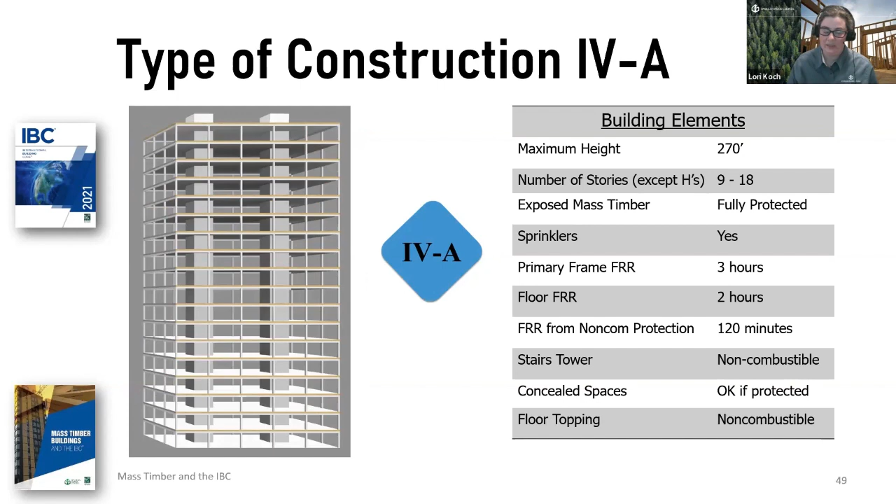A primary difference between type 4B and type 4A is the material that stair and elevator shafts are permitted to be made out of. In type 4A, the stair tower is required to be non-combustible, so you'll often see it constructed from concrete or masonry. For type 4B, you are allowed to have protected mass timber as your stair tower.

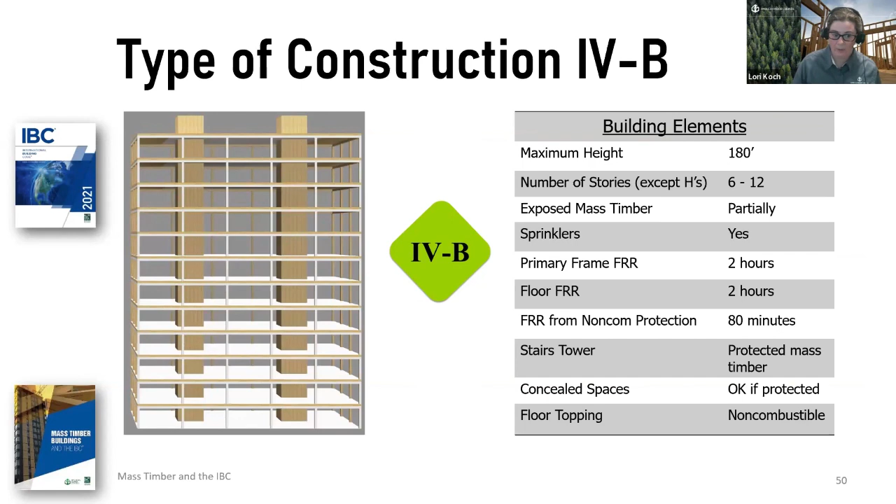There is also language that limits how close unprotected mass timber elements can be to each other. They need to be at least 15 feet, or about 5 meters, apart from exposed portions of other walls or ceilings that are exposed. The intention is to reduce the amount of potential heat flux that one exposed area might receive from another in the event of a fire.

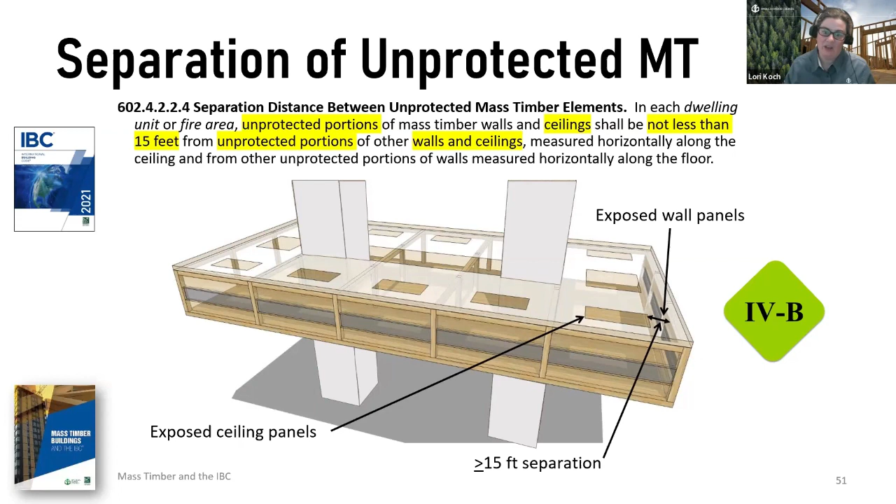Type 4C is where we can visually see the most mass timber. All interior mass timber can be exposed. There are certain areas that do have non-combustible protection requirements. The exterior, the outside of exterior walls, is required to have 40 minutes of protection. While there aren't requirements for floor toppings in type 4C buildings like we saw in type 4A and 4B, the floors do have to meet the provisions of IBC section 804, which is a general requirement that applies to floors of other construction types as well.

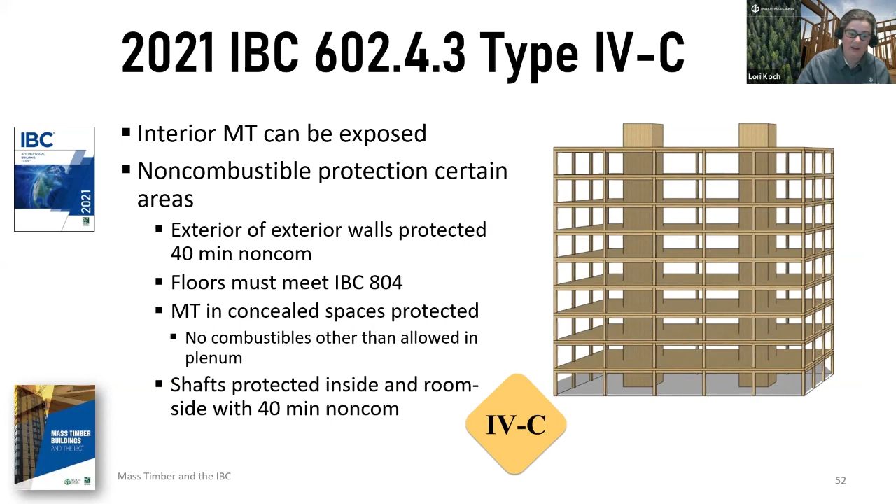If we do have mass timber in concealed spaces, it needs to be protected, and you can't have any combustibles inside of those. Stair shafts or elevator shafts would need to be protected on the inside and the room side with 40-minute non-combustible protection as well.

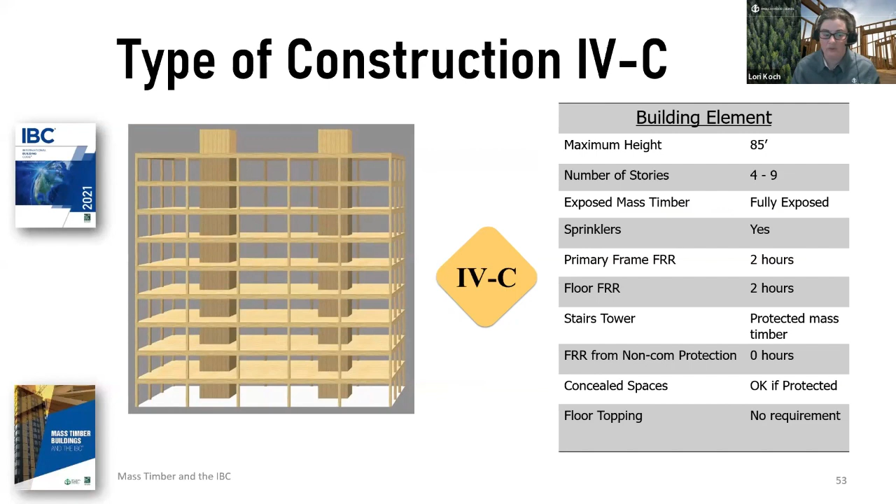These buildings would be allowed to be up to 85 feet in height, about 26 meters. The maximum number of stories would range from 4 to 9, and again, you can have all of your mass timber fully exposed. These are still required to have sprinklers in them, and there's no specific requirements on floor toppings, but stair towers do need to have the mass timber protected.

If we want to compare all of our type 4 wood and mass timber construction in one slide, this is that slide. Type 4 heavy timber is our historic allowable structure, and we saw a maximum building height for many years of 85 feet. Comparing that with a type 4C building, you see the same height restriction of 85 feet, roughly 26 meters. The only difference is in the allowable number of stories, so the building heights are the same, you can just have more floors in a type 4C building.

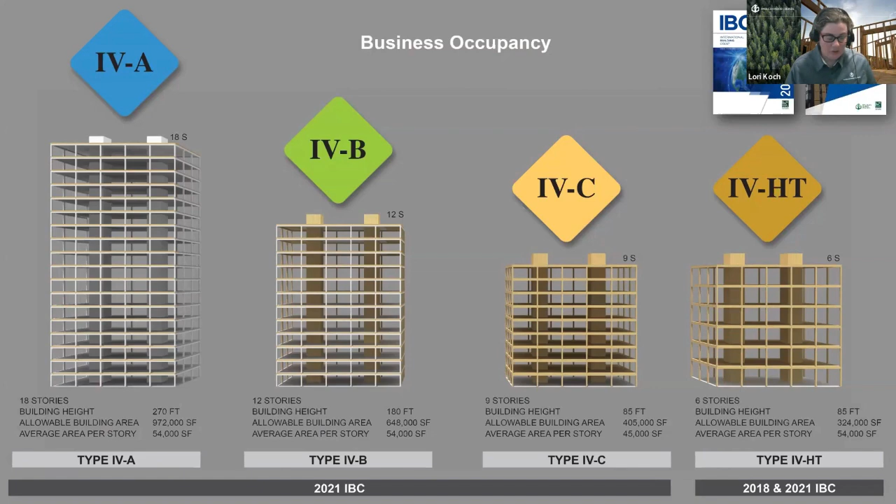Type 4B is up to 180 feet or about 55 meters. And type 4A is around 270 feet or 82 meters.